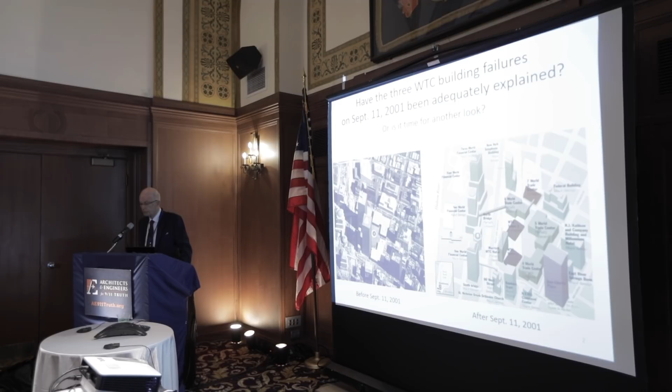The issue of the failure of these 3 buildings was a political event from the outset, because it was a shocking crime of mass murder that caused us to question our national security. Accusations and counter-accusations surrounding the circumstances of the event arose immediately and continue to this day.

The engineering profession was thrust into the middle of this controversy because we're the experts in the design and construction of commercial structures and bear the responsibility for the safety of the people using them.

Project Due Diligence, which Architects and Engineers for 9/11 Truth is publicly launching today, is our effort to strip away the political aspects of this world-changing event and look at the scientific facts gleaned from the evidence.

Our aim is to determine one thing and one thing only: did the buildings fail for the reasons given to us by the official reports? We will focus only on that question.

The information you will hear today has been collected by literally thousands of persons, both inside and outside the field of engineering, who have donated their time, money, and expertise in order to determine the truth of what happened at the World Trade Center on September 11, 2001.

So many people have contributed to this effort that it would be impossible to name all of them. But please realize that the distillation of evidence you will see today is the result of hundreds of thousands of hours of work performed mostly by volunteers and guided by the AE 9/11 Truth staff.

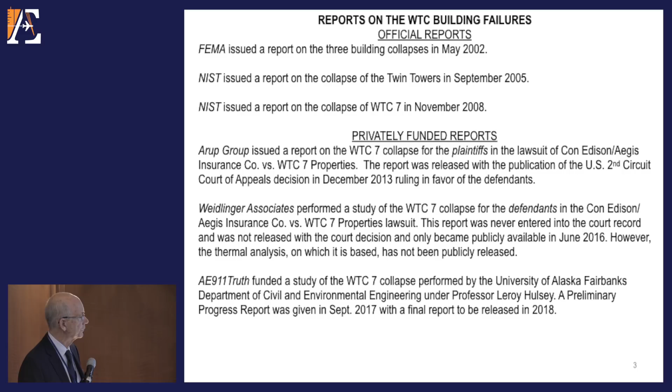Then there have been 3 privately funded reports that just looked into Building 7. The first 2, the Arup Group and the Weidlinger Associates, were done for the plaintiffs and the defendants in a lawsuit that was brought by Con Edison and their insurance company against WTC 7 Properties. Those were privately funded reports.

In addition to that, there's the study that we funded, which again looks at World Trade Center 7. There was a preliminary report last year in September done by the University of Alaska Fairbanks Department of Civil and Environmental Engineering under Professor Leroy Hulsey. So those are the sum totals of the reports on the building failures that have been done to date.

We're going to look at Building 7 first. It was the third high-rise to collapse that day. It collapsed in the afternoon, about 5:20. It was some distance away from the North Tower.

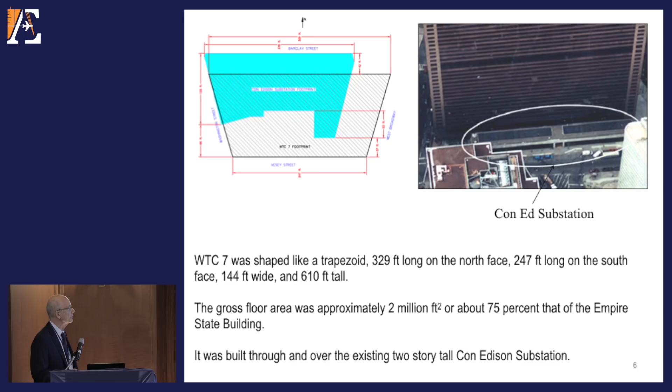47-story building. Each floor had an area of about an acre, shaped like a trapezoid, with gross floor area about 2 million square feet. It was built through and over the existing 2-story tall Con Edison substation, which you can see here. This is the floor plan of everything above the Con Edison station.

The upper right-hand corner of that floor plan is the northeast corner of the building, and that is the area we're going to focus on, because it is that area where NIST says the collapse began. You can see that there are 58 columns on the perimeter, and 24 central columns in the middle.

We're going to stand right here and look west so that we can see the structural members that are of concern here. This is that view. This girder right here is the girder that NIST says walked off of its column support at column 79, which is in the interior of the building.

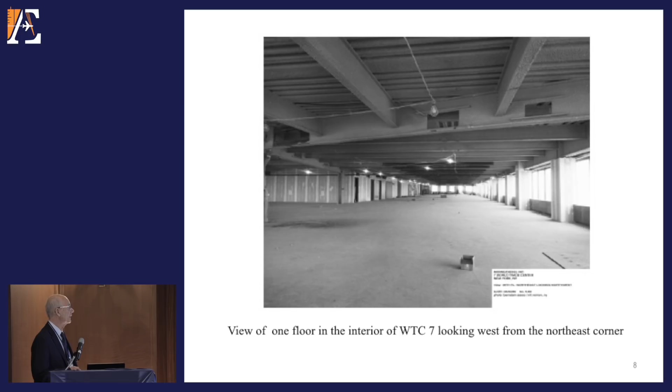It was pushed by these beams, which frame into it. Those beams were heated by the fire. They expanded and sagged, and they caused that girder to walk off its seat, and that led to a cascade of floors down below, which initiated the collapse. So we're going to pay a lot of attention to the facts surrounding those beams, that girder, and the column.

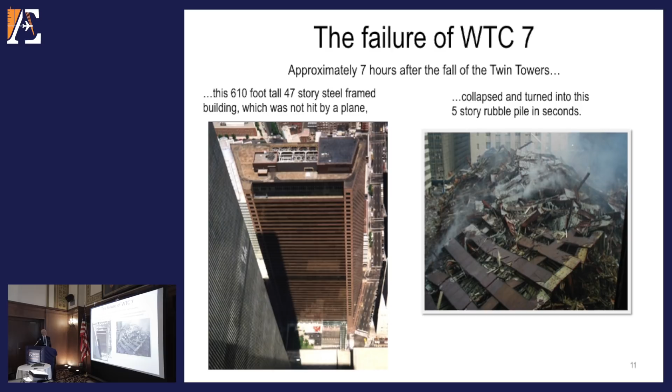When it failed, about 7 hours after the Twin Towers went down, this 47-story steel frame building, which was not hit by a plane, collapsed and turned into this 5-story rubble pile in about 7 seconds. We'll see what it looks like here.

For the third time today, it's reminiscent of those pictures we've all seen too much on television before, when a building was deliberately destroyed by well-placed dynamite to knock it down.

Did they actually use the word brought down, and who was it that was telling you this? The fire department, and they did use the word, we're going to have to bring it down.

We heard this sound that sounded like a clap of thunder. It looked like there was a shock wave ripping through the building, and the windows all busted out. About a second later, the bottom floor caved out. The building followed after that, and we saw the building crash down all the way to the ground.

And I turned in time to see what looked like a skyscraper implosion. It looked like it had been done by a demolition crew. The whole thing just collapsing down on itself.

It was almost as if it were a planned implosion. It just pancaked.

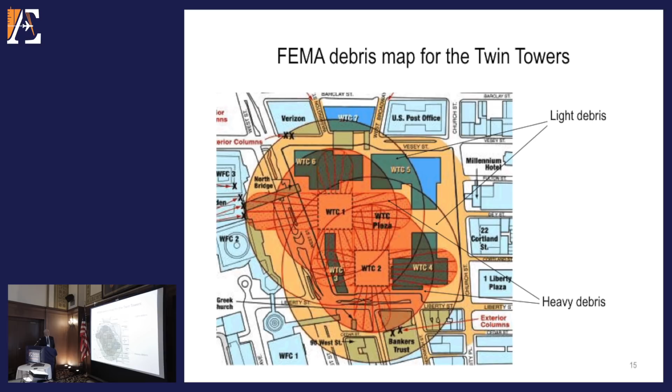That building was 350 feet away from the North Tower, and a small amount of debris from the tower hit World Trade Center 7 when it collapsed. FEMA mapped the debris, and you can see that the light debris from World Trade Center 1 reached the southern face of the building.

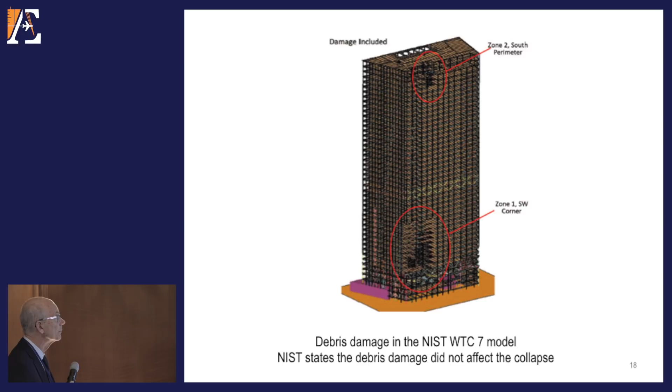NIST mapped the damage, and they indicated that the debris hit the lower part of the building in the southwest corner and hit in the upper part of the building near the top. There was diesel fuel in the building.

FEMA says that the diesel fires had a low probability of occurrence, and NIST agreed. Most of the fuel was recovered from the main tanks in a vault below ground level, and firefighters testified they neither saw nor heard nor smelled diesel fuel fires.

In the early stages, people thought maybe it was the diesel that had caused the collapse and the fires from that were affected, but NIST said no. There were fires on the 7th, 8th, 9th, 11th, 12th, 13th, 19th, 22nd, 29th, and the 30th floors. The fires on the upper 4 floors were out by 1:30.

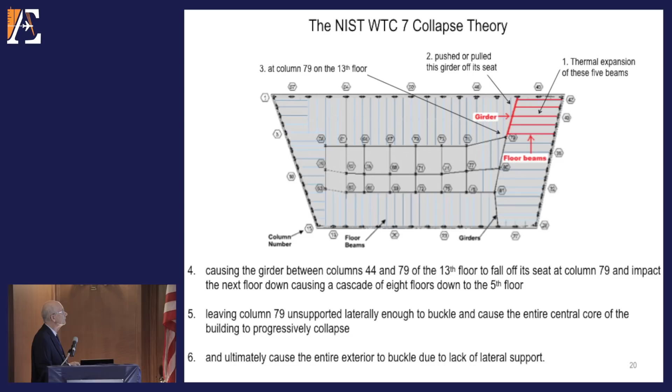Now we'll look at their collapse theory. NIST says that thermal expansion of these beams pushed or pulled this girder off of its seat at this column, column 79. And that occurred on the 13th floor.

That caused that girder to fall off its seat and impact the next floor down, which caused a cascade of floors all the way down to the 5th floor.

That, in turn, left column 79 unsupported laterally for 9 floors, and it buckled as a result, and that buckling spread from north to south and from east to west through the central core columns, and they in turn collapsed, pulling down the columns on the outside, initiating global collapse. So that's their theory.

We're going to look at the mechanism of that theory. According to NIST, the reason for the collapse was totally due to office fires. Now, office fires burn out an area in about 20 to 30 minutes because they run out of combustibles.

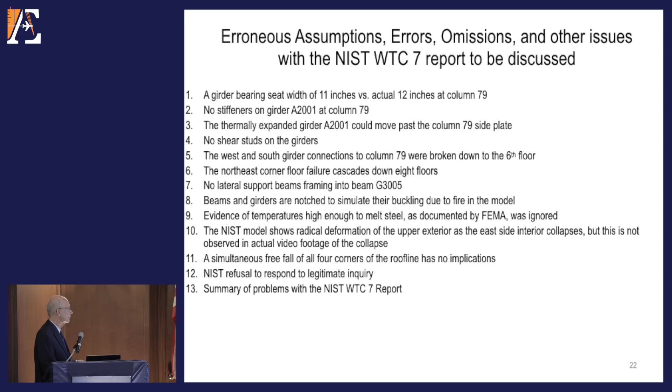That there were evidence of temperatures high enough to melt steel, documented by FEMA, that NIST ignored, and that their model shows radical deformation of the upper exterior as the east side interior collapses, but that's not observed in the actual video footage of the collapse. And they claim that a simultaneous free fall of all 4 corners of the roofline has no implications.

Then they refuse to respond to legitimate inquiry. And lastly, we'll summarize the problems with their report. So we're going to look at those issues one at a time.

So in other words, the girder, which sat here, once it was pushed past, the web was pushed past the edge of the seat, it had lost support and it would fall. So they said that needed to happen after 5.5 inches, half of 11 inches.

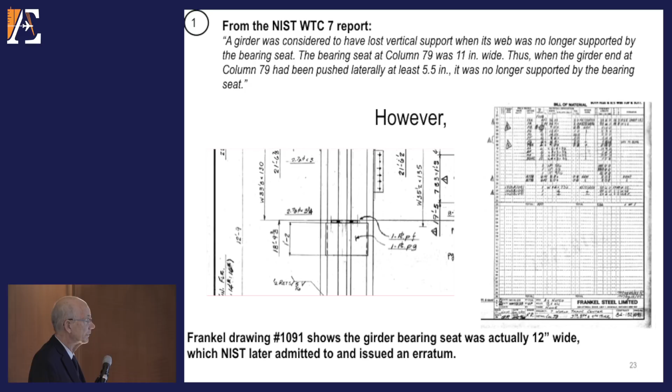But the construction drawings, the Frankel drawing, showed, drawing 1091, showed that the girder bearing seat was actually 12 inches wide. NIST later admitted that, and they issued an erratum, which was, I think, the only thing that they admitted to.

We're going to take a minute and look at the temperatures that the structural members were exposed to. The NIST report claimed that the beams were heated to 600 degrees centigrade, the girder to 500 degrees centigrade, and the columns to 300 degrees centigrade in the area around column 79.

So looking at the effect of those temperatures on the various members, this is the graph of the temperature versus the strength, and this is a graph of the temperature versus the stiffness. Both those things would be affected by temperature. So we'll take a look at those one at a time.

For the beams at 600 degrees centigrade, they would lose about half of their strength at that temperature, and they would lose about 70% of their stiffness. For the girders heated to 500 degrees, they would lose approximately 20% of their strength and approximately 40% of their stiffness. And the columns at 300 degrees wouldn't lose any of their strength and would lose about 20% of their stiffness.

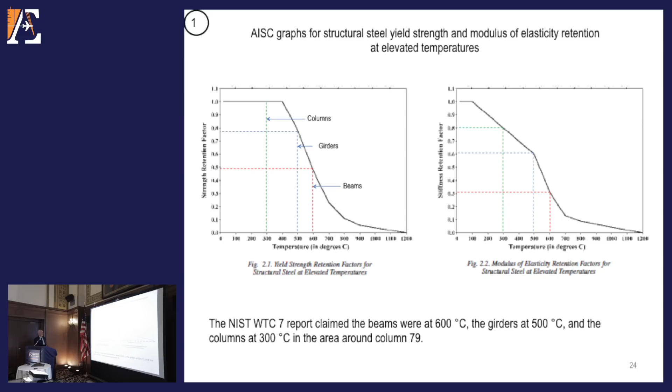Looking at the beams at 600 degrees, we see at that temperature it expands a little over 5.5 inches, but it also sags about 1/8 of an inch, for a net horizontal expansion of about 5.39 inches. That's what the statistics would indicate, where coefficient of expansion is due to heat, and it's sagging and loss of strength. The maximum that beam could ever expand is right here at 654 degrees, because at that point the horizontal expansion is about 6.17 inches, it's sagging about 0.44 inches, for a net expansion of 5.7. It could never expand any more than that, because after that the sagging takes over and it gets shorter again. So those beams could never push that girder more than 5.7 inches.

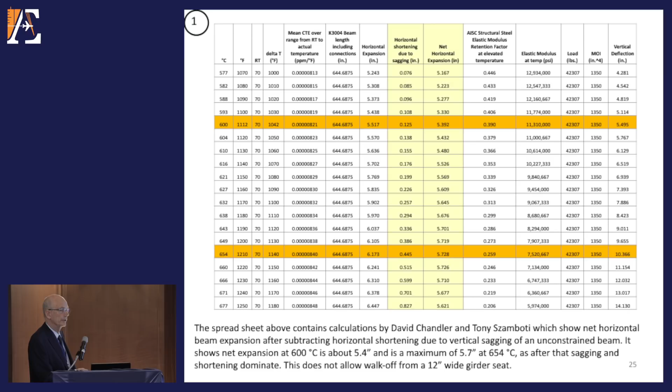So when the seat is 12 inches wide instead of 11 inches wide, the web of the girder can't get past the edge of the seat, and the girder can't fall off of the seat. So that's one of the problems that the NIST report has.

Looking at that girder connection to the column, this is the NIST depiction here. You see the girder, it's sitting on its seat, supported by its plate. The problem with this depiction is that in reality there were a couple of stiffener plates that were welded to the girder, both at the web and at the lower flange, and those stiffeners would significantly strengthen this flange here, so that if the girder were able to move past the edge of the seat, this stiffener plate would make this flange so stiff that it wouldn't curl up and the girder wouldn't fail and fall off. NIST left those stiffener plates off of their analysis.

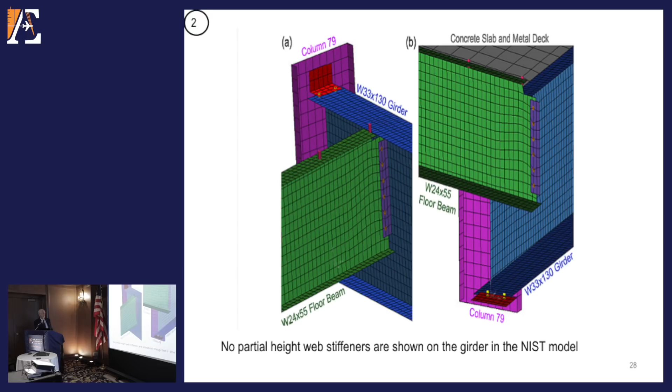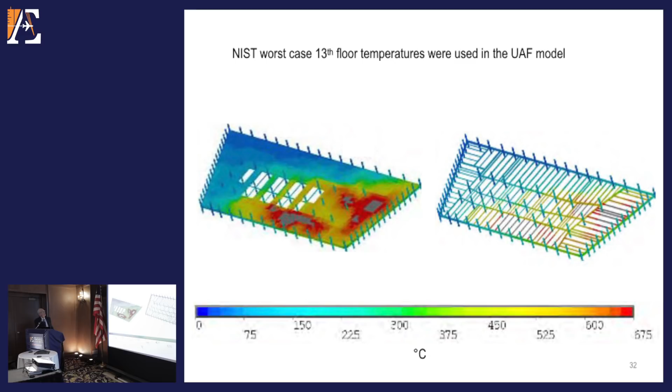We're now going to turn for a moment to the study that was done at the University of Alaska Fairbanks, and look at their finite element modeling of that particular portion of the building. This is their finite element model. It's in Abaqus, and this is the 12th and 13th floor. Again, we're looking at this area here, the northeast corner. For the University of Alaska study, they took the worst case temperatures, and this is their finite element model of that portion of the floor. It's the northeast corner, column 79 here.

And their analysis showed that with the stiffener plates attached to the girder, right here, even when the web of the girder has moved past the corner of the seat, this stiffener plate stiffens this flange to the point where it's not going to curl up and give up and allow the girder to fall. NIST finally admitted leaving the stiffeners out.

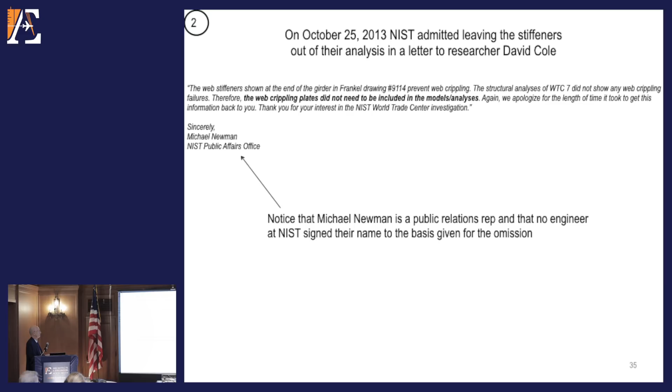In this letter, they said that the web stiffeners were added at the end of the girder to prevent web crippling, and the structural analysis of World Trade Center did not show any web crippling. Therefore, the web crippling plates did not need to be included in their model analysis. So that is a rather startling statement, and we see that it was made by somebody in their public affairs office, and I'm sure he didn't realize the significance of what he was saying, because no engineer would make that statement.

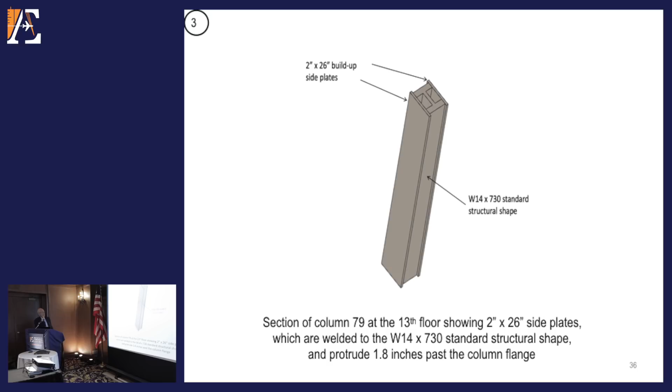Then there's the issue of side plates on the column. The side plates were welded to the column, and they protruded 1.8 inches past the column flange. This occurred at every floor.

So the UAF study shows that when you heat the beam, it pushes on the girder, the girder expands, and it gets trapped behind those side plates, so there's no way it can be pushed off of the seat. So NIST just left those side plates off, or didn't include them in their analysis. They didn't consider that question at all, the fact that that girder could never get out past those side plates.

Then there's the question of shear studs on the girders. NIST said that girder, 45 feet long, had no shear studs on it. But the final version of the revised drawings showed that there were 30 shear studs on that girder.

Why is that important? Well, NIST does an analysis of shear studs, and they show that the force required to shear this stud off is about 19.5 kips. So if you take that 19.5 kips times each of the 30 shear studs, that would be a total of 585 kips that would have to be applied by the 5 beams from the east, pushing on the girder in order to break those shear studs. That's 117 kips for each of the 5 beams.

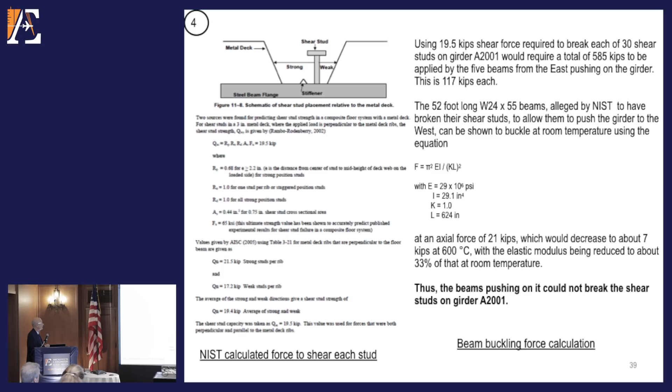But if you put an axial force of 21 kips on those beams, they begin to buckle, and they can't push any harder than that. When you increase that temperature to 600 degrees, which is what the beams are supposed to be at, that force is reduced to about 7 kips. So there's no way that a 7 kip force exerted by those beams is going to create the 585 kips necessary to break those shear studs.

NIST then claimed that the cascading floors, the girder at floor 13 fell down, hit the 12th floor, creating a cascade all the way down to the 5th floor. That left this column unsupported with no lateral support, and that's why it buckled. But there's a problem with that, because their own damage connection information shows that this is not true. They show that there was no damage to the girders from the south and the west at floors 8, 9, and 13.

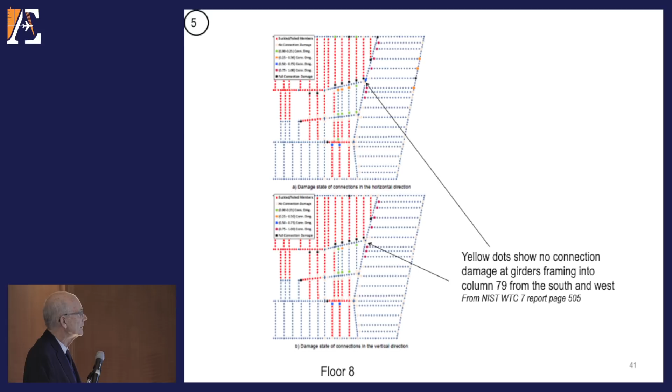We can show that here. This is off of their report. The yellow dots at the girder coming in from the south and coming in from the west, for the vertical and for the horizontal direction, shows that those connections were intact on the 8th floor. They were also intact on the 9th floor. They were also intact on the 13th floor.

So if that's true, column 79 wasn't unsupported all the way down. And this scenario that they point out is impossible, because the moment of inertia of that column shows that it could span at least 5 stories with no lateral support without buckling. So according to their own diagram, it was never unsupported for more than 3 continuous stories. Their own scenario, their own data, shows that their own analysis is not possible. That's called an internal contradiction in their report.

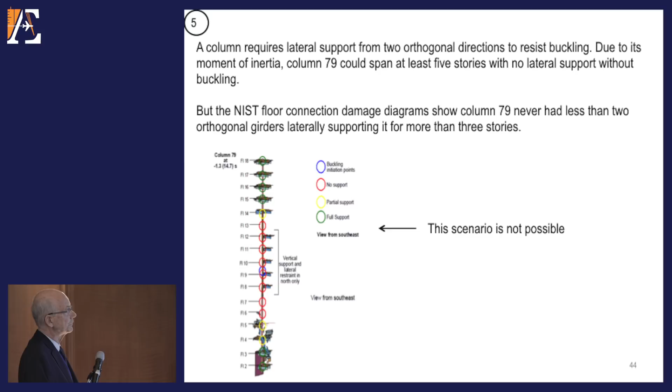Furthermore, even if we allow the girder to fall, forgetting everything that happened earlier, just allow the girder to fall, and that section of the floor is going to fall down. It's going to hit the floor near the column on the 12th floor. Now, the force required to shear the welds at that column, at the 14-inch deep support plate under the girder, is about 632,000 pounds. So that's the force we have to have hitting the floor before we can begin the cascade process.

So we did a modal analysis of that section of the floor. Here it is, the 5 beams and the girder, and you can figure the frequency of this system, which turns out to be about 0.52 hertz. You can use that to find the stiffness of this section, which turns out to be about 6,600 pounds per inch.

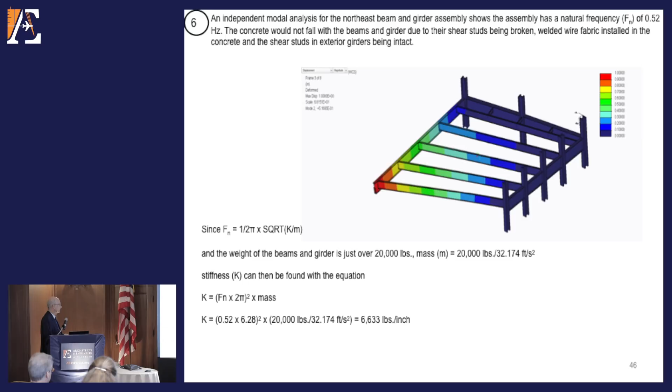Taking that stiffness and combining it with the stiffness of the floor below, which is very high, about 7.5 million pounds per inch, combining them you still get about the same number, because you use a reciprocal formula to figure that out. So the large stiffness of the floor below doesn't affect this number very much at all. Then you have a stiffness for the total system, the floor above and below, and you can figure the deflection using this formula, which turns out to be about 32 inches. So when the upper girder hits the lower floor, it deflects about 32 inches. Using that, you can find the force, which turns out to be about 215,000 pounds.

Well, that's only about a third of the 632,000 pounds that you need. And furthermore, when you heat it to 500 degrees, which is what they said the girder was heated to, the stiffness gets less, and the force it imparts to the lower floor also gets less. So you're only getting about 166,000 pounds, and you need 4 times that much in order to break that shear. So that shows that the cascade effect could never occur.

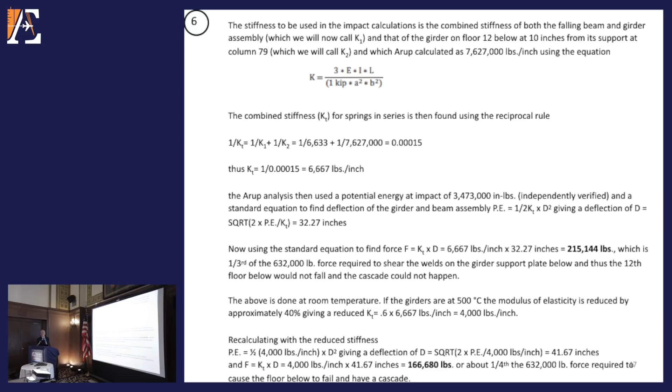Then we're going to look at the northernmost beam here. This is what they term beam G3005, and in reality that beam had 3 lateral supports coming into it from the north face of the building. The NIST analysis removed those, didn't show them at all. Now, that turns out to be important, because if you heat that beam to 600 degrees and there's no lateral support beams there, that beam's going to buckle.

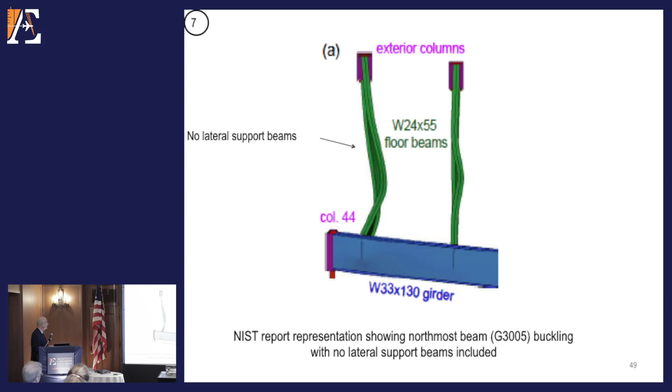That was confirmed by the UAF study. It said yes, without those beams there, that beam will buckle. However, when you put the beams in to check it, you see that it doesn't buckle.

Then there's the issue of what they did to the floor beams and girders. Here we see a picture from their report showing the floor beams and girders at the southwest corner of the building. They have notched the beams and girders in a very systematic fashion - you see they always notch half on one end on the upper side and on the lower side on the other side. They do that consistently throughout.

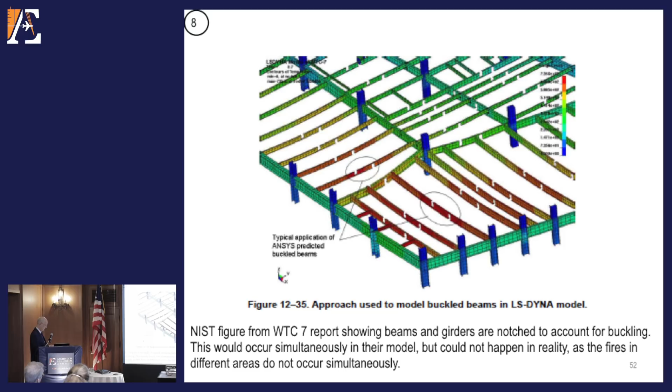Well, they do that because they have to get their global collapse theory to work. In other words, once they've got the interior columns to go down, they need to pull down the exterior columns, so they notch the beams to make it happen. But there's no justification, because the only thing working on those beams is fires, and fires are not going to create that kind of symmetrical damage to the beams and girders. So that is a totally unjustified assumption - they just do it to make their system work.

Then there's the issue of high temperatures. This is the only piece of metal that was salvaged from World Trade Center 7. NIST ignored this piece of evidence.

When that metal was examined by FEMA, they said they had microstructural changes, severe erosion, severe high temperature corrosion attack on the steel, including oxidation and sulfidation, with intergranular melting readily visible - a liquid eutectic mixture containing primarily iron, oxygen, and sulfur formed during this hot corrosion attack on the steel. And the eutectic temperature for this mixture strongly suggests that the temperature in this region of the steel beam approached 1,000 degrees centigrade, which is substantially lower than would be expected for melting the steel.

So how can you get steel to melt at 1,000 degrees? Well, you add things like sulfur. If you took thermite and added sulfur to it, you get thermate. That lowers the melting point of steel - that would be what you would do with an incendiary. Again, NIST completely ignored this piece of evidence.

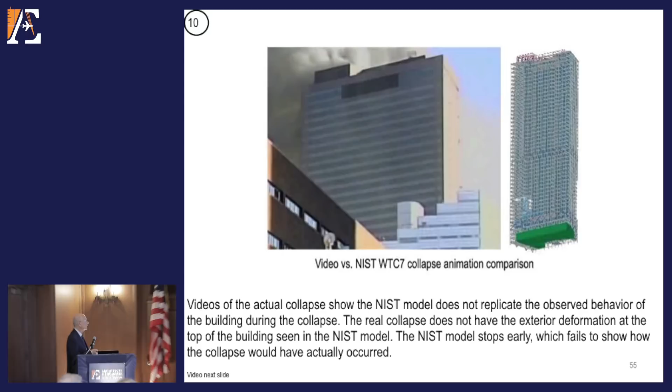We're going to look at the comparison of the actual collapse on your left with the NIST model on your right, and compare how they appear - whether similar or different. You can see down here in this area, that's the northeast corner of the building. The 13th floor collapses first, column 79 becomes unsupported, and so on. But you see what begins to happen to their model - in fact, they stopped their model after a few seconds into the recording. Compare what you're seeing on your right with what you're seeing on the left.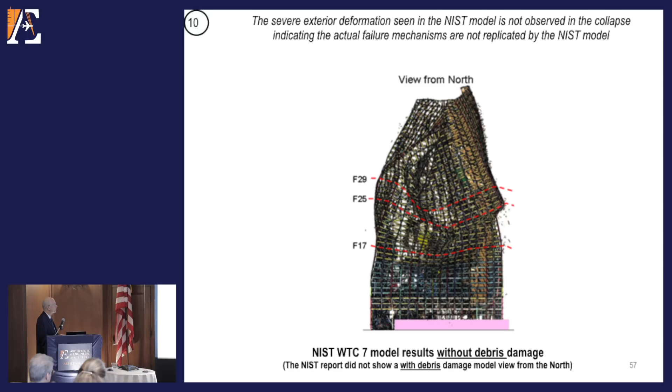This is a diagram of what that collapse of their model would look like a few more seconds into the sequence. You see why they stopped the sequence - the top of the building has twisted completely around, and the building doesn't look anything like what it looked like when it actually collapsed. This particular model is their model without debris damage to the building. They didn't even show the one with debris damage, so it must have been just as bad or worse.

Next, we look at the question of free fall acceleration. A physics teacher, David Chandler, analyzing the video, proved that the entire roof line of the building was in full free fall acceleration for about 2.5 seconds, which would be about an 8-story fall. That occurred near the beginning of its collapse. NIST was confronted with this fact during their draft report, and they admitted it in their final report, but they didn't address the implications of free fall, and they didn't change their model or their conclusion.

Here we've got a graph of the velocity of the top of the building versus time, and we see at about three-quarters of a second into the collapse, it went into free fall. The slope of this line is free fall acceleration, and that occurred from about three-quarters of a second to well over 3 seconds.

That's important because columns provide resistance during buckling. Once you initiate buckling in a column, the force required to continue buckling decays until the ratio of deflection to length reaches about 0.5. You still got a ratio that is something about a third.

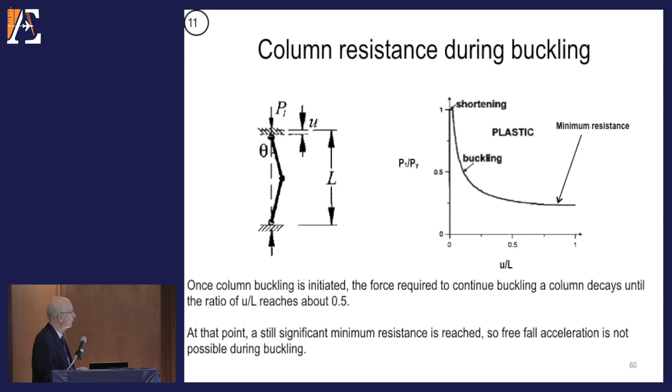Now in free fall, all of an object's potential energy is converted to kinetic energy. It can't be doing any other work. So the free falling upper section, C, could not have been crushing the lower portions B and A, or itself. It appears that section B is not providing any resistance at all. Since the NIST model never accelerates at more than 60% of free fall, it cannot explain this free fall episode in the collapse.

So all the assumptions below, which were used in their model and in their report, have been shown to be erroneous, and the correction of these assumptions invalidates their conclusion. The girder bearing seat was 12 inches, not 11 inches.

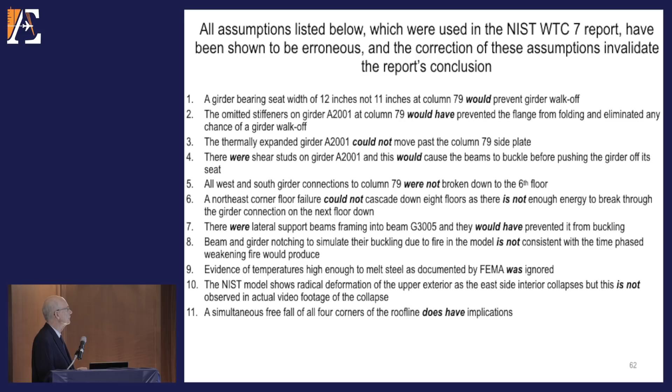The omitted stiffeners would have prevented the flange from folding and eliminated any chance of a girder walk-off. The thermally expanded girder could not move past the side plate on the column. There were shear studs on the girder, and this would cause the beams to buckle before pushing the girder off of its seat. All west and south girder connections were not broken down to the 6th floor.

Northeast corner floor failure could not cascade down 8 floors. There's not enough energy to break through the girder connection on the next floor down. There were lateral support beams framing into beam G3005, and they would have prevented it from buckling.

The beam and girder notching that NIST used to simulate their buckling due to fire in the model is not consistent with time-phased weakening that fire would produce. That evidence of temperatures high enough to melt steel, documented by FEMA, was ignored.

Their model shows radical deformation of the upper exterior as the east side interior collapses, but this is not observed in the actual video footage of the collapse. And a simultaneous free fall of all 4 corners of the roof line does have implications.

NIST refused to respond to legitimate inquiry. When asked by engineers to provide calculations and analysis results substantiating the girder walk-off at column 79 and the impact force required to break through the next floor down, the NIST director refused, claiming that it might jeopardize public safety.

So here's the letter that Ron Brookman, who happens to be here, wrote, and their response. And another letter that was written later by another engineer, same response: might jeopardize public safety. So they've taken the position that a discussion of the laws of physics might jeopardize public safety, which has got to be a first in history.

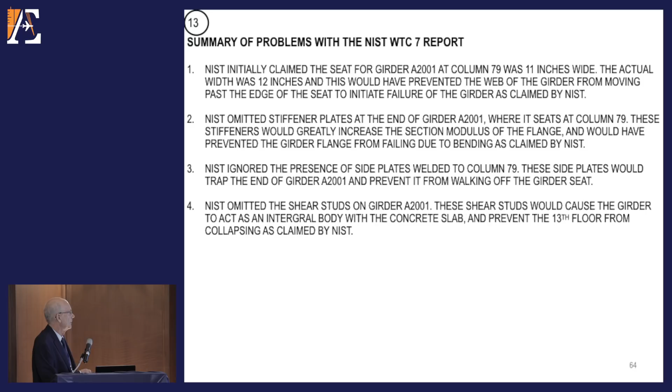They claimed column 79 was laterally unsupported for 9 stories, but their own data showed it wasn't. They omitted the lateral support beams into beam G3005 that would have prevented it from buckling.

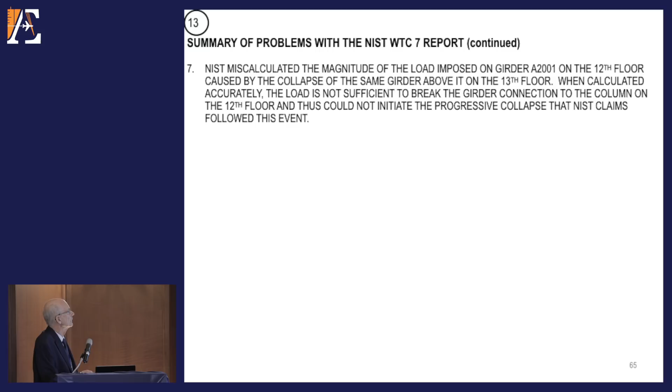They miscalculated the magnitude of the load imposed on the girder on the 12th floor caused by the collapse of the same girder above it on the 13th floor. When you calculate that accurately, the load isn't sufficient to break the girder connection to the column and could not initiate the progressive collapse that they claim followed it.

They imposed unrealistic artificial fire damage symmetrically to the floor beams in order for their computer finite element model collapse sequence to work.

They omitted the information contained in Appendix C of the FEMA report showing that the steel had evidence of intergranular melting.

Their computer model doesn't replicate the actual collapse because it deforms significantly more than what's observed, and they stopped their simulation after about 2 seconds.

They acknowledged that the building fell in free fall for 2¼ seconds, but that violates their fire-induced theory of collapse initiation, because asymmetrical fire damage couldn't result in symmetrical simultaneous loss of all 81 columns. And they refused to release relevant input data for critical calculations of their collapse models, saying that this information could jeopardize public safety.

All right, now we're going to look at the Twin Towers.

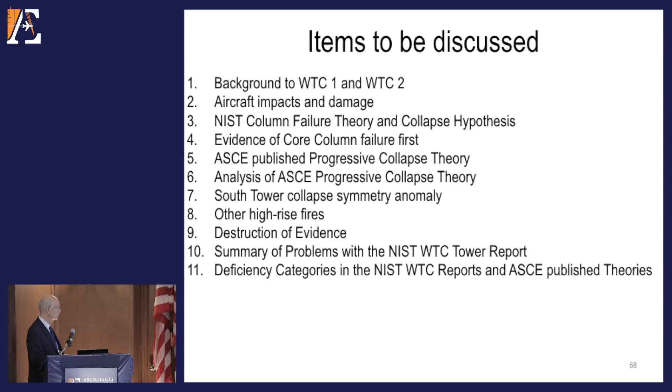We're going to look at the background into the construction and design of the buildings, look at the aircraft impacts, the NIST column failure theory and their collapse hypothesis, the evidence that the core columns failed first. We'll look at the ASCE published progressive collapse theory and analyze that theory. We'll look at the South Tower collapse and the symmetry anomaly, other high-rise fires, and the destruction of the evidence. We'll summarize the problems with their tower report, and categorize the deficiencies in their report and in the ASCE published theories.

The Twin Towers were a departure from the high-rise tradition. Most high-rises were built with a continuous grid of steel columns, beams, and girders. The Twin Towers were built as a tube structure with a dense mesh of welded and bolted steel placed on the perimeter, giving more efficient lateral load resistance. It also had an internal core of large welded steel columns connected by bolted horizontal beams at every floor, and the core and the perimeter columns split the gravity loads.

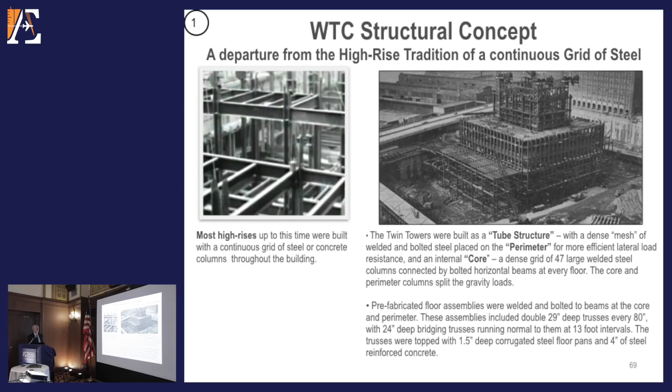So half the load is carried on the outside, half's carried with the core. Then you have prefabricated floor assemblies welded and bolted to the beams at the core and at the perimeter, made up of double 29-inch deep trusses every 80 inches with 24-inch deep bridging trusses running normal to them every 13 feet. They're topped with 1.5 inch deep corrugated steel floor pans and 4 inches of steel-reinforced concrete. This allows for a much more efficient use - you can build the building lighter and stronger.

These structural innovations allowed for an open floor plan. The perimeter of the building was a 207-foot square. The core in the middle is 135 feet by 87 feet, and the largest floor span allowed is 60 feet.

They were very solidly constructed, had 47 massive steel core columns, 240 steel perimeter columns. That amounts to a steel frame that was a 100,000-ton heat sink.

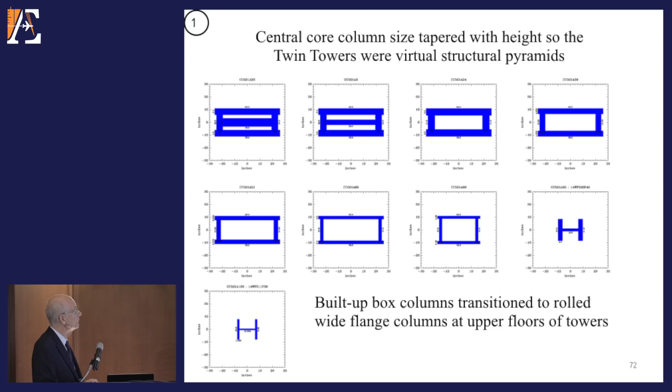The central core columns were tapered as they rose up into the building, so they were virtual structural pyramids at the lower floors - heavy as they rose up into the towers. They eventually transitioned to rolled wide flange sections so that the very solid bottom got lighter as it went up at the top, because of course it had less weight to carry.

There were 12 different strength steels used at different heights on the perimeter columns. That's to accommodate the wind load and the seismic stresses, keeping the gravity-induced unit stress on both the perimeter and the core columns at each floor the same. That's to eliminate floor warpage.

The planes hit the buildings on 9/11. The North Tower was hit first at 8:46. It collapsed 102 minutes later. That was American Airlines Flight 11, a Boeing 767-200 extended range, with an estimated velocity of 473 miles per hour. It hit in the dead center of the north wall between the 93rd and the 99th floor.

The South Tower was hit at 9:03, 17 minutes later. It collapsed in 56 minutes. That was United Airlines Flight 175, the same aircraft, a 767-200ER. Estimated impact velocity was 566 miles an hour, and it hit on the south face of the South Tower between the 77th and the 85th floor.

You see it did not hit straight on like the North Tower was - it hit at an angle more towards the corner of the building. Notice also that the shape of the central core was different. Here you're hitting on the long side, on this one you're hitting on the short side.

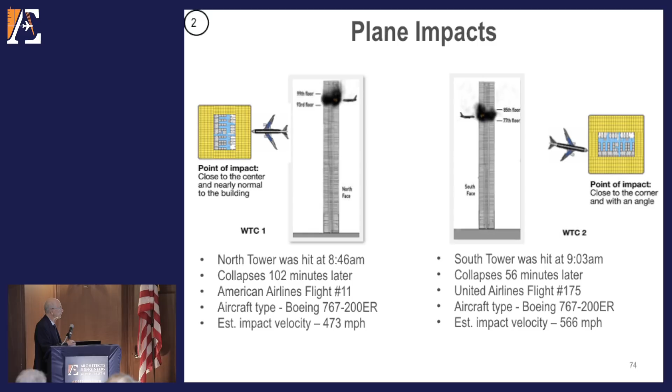Looking at the North Tower, it hit between the 95th and the 96th floors, pitched about 10 to 11 degrees down, and the 98th floor is where the collapse actually initiated. There's no argument about that because that's photographic evidence. Up here is where the collapse started - the plane hit down here.

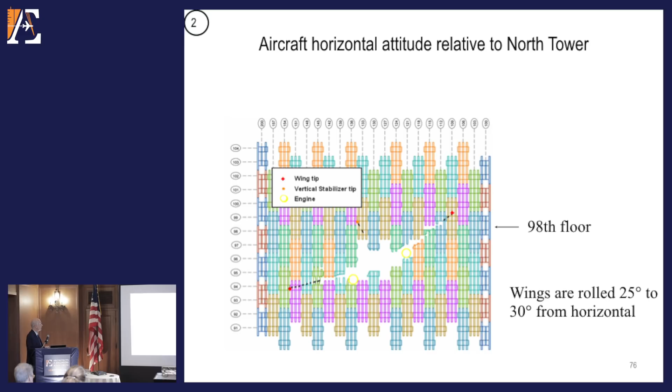If you look at the north face, you see that the wings were rolled up at about 25 to 30 degrees, so the impact zone looked like this - between the 95th and 96th floor mainly. You see the 98th floor had very little damage to it.

Here's a discussion of that impact. The fact that they were designed to resist over 13,000 tons of wind pressure meant that they could not be knocked over. In a remarkably prescient interview given over 15 years ago, Charlie Thornton, now one of the investigators, considered the scenario: 'Well, 13,000 tons is a lot of force. People always talk about an airplane crashing into a building. And in 1944 or 45, a plane did crash into the Empire State Building.'

The largest aircraft flying today, at least commercially, the 747 fully loaded, is on the order of 300 tons. If you think about a 300-ton element crashing into a building that's been designed to carry 13,000 tons, you can see that an aircraft crashing into the World Trade Center would probably not do anything to the major building. It could affect localized structural elements, could knock out a column, and there could be some damage.

But as far as a plane knocking a building over of that type, that would not happen. Since the Empire State accident had shown that a plane could crash into a New York skyscraper, the designers were forced to consider the possibility. In fact, the towers were designed to take a hit from a Boeing 707. John Skilling, the designer, said that his analysis indicated the biggest problem would be the fact that the fuel would dump into the building, but the building structure would still be there.

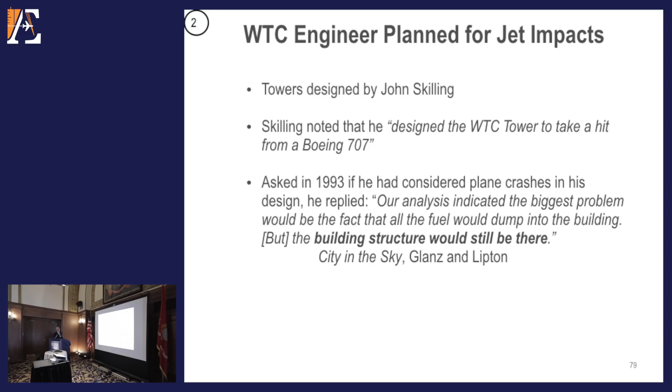The Boeing 707 is very close in size to the Boeing 767s that actually hit the building. The robustness of the perimeter frame tube system and the large size of the building helped the towers withstand the impact, and the structural system redistributed the loads without collapsing in the place of the aircraft impact. That's what NIST admits. Looks something like this.

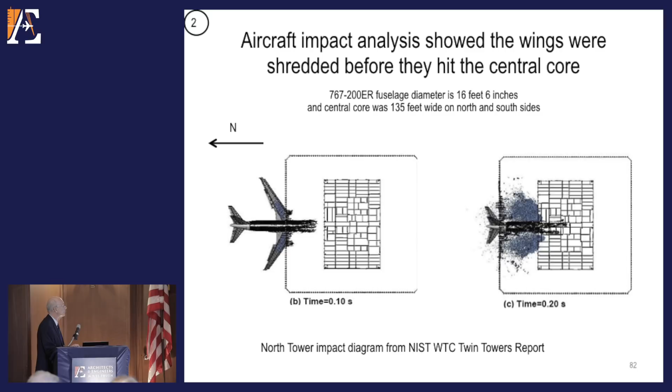They analyzed the aircraft impact, this is the North Tower again, and said that the wings were shredded before they hit the central core. The diameter of the fuselage is only about 16.5 feet. The central core was 135 feet wide. So there's very little damage to the central core caused by the plane impact.

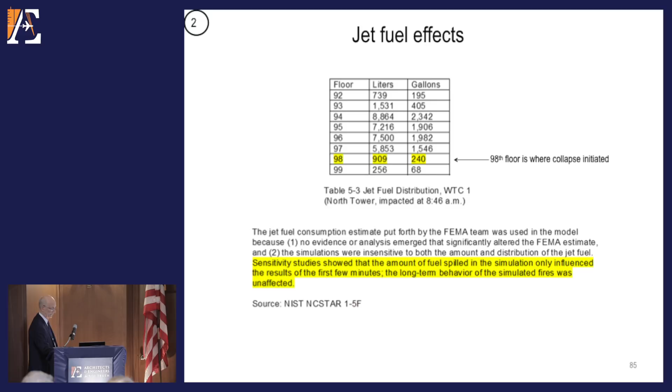As to the jet fuel effects, on the 98th floor you only got about 240 gallons of the total of 10,000 gallons that the planes carried that were distributed to that load. The amount of fuel spilled in the simulation only influenced the results in the first few minutes. The long-term behavior of the simulated fires was unaffected. So most of that fuel burned off rapidly, and the remaining fires were caused by the contents of the building.

Here's why the aircraft impact and the jet fuel could not have caused collapse. The wings didn't make it to the central core. Most of the jet fuel was aerosolized on impact, and much of it remained outside the building. That which did enter the building burned up within a few minutes. The redundant steel frame redistributed the loads, and the factor of safety against vertical collapse for the perimeter columns was 5-to-1, and for the central core was 3-to-1. This is far too high for the impact damage to approximately 20% of the columns to have caused collapse.

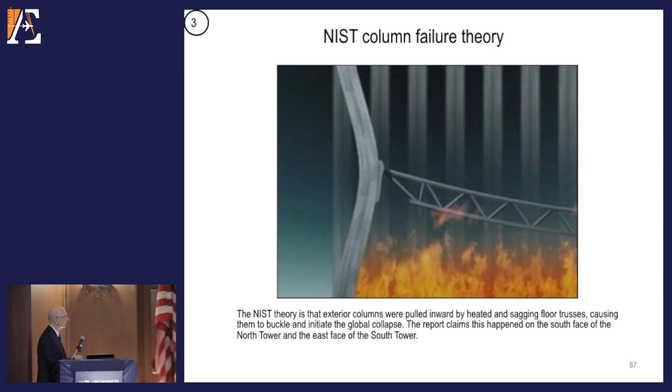Now, the NIST theory is that the perimeter columns failed in the following manner: the fires inside the building heated up the floor trusses, and the floor trusses eventually buckled and sagged and pulled the perimeter columns in, and they buckled, and that's what initiated the collapse of the building.

However, their global model couldn't produce an inward force from the sagging floor trusses that was strong enough to pull the columns inward. So they supplied an inward bowing force of 5,000 pounds to each truss-to-column connection at each story in the impact zone.

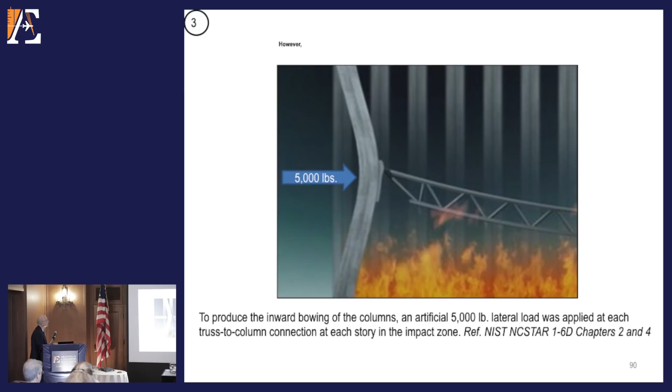They did that because they said, well, we see that the columns bowed in before the buildings collapsed. We couldn't get the force with the sagging floor trusses, so we'll apply these artificial forces in order to make it work. Very creative. That force of 5,000 pounds to each undamaged truss-to-column connection is about 750 kips that they applied to that face of the building in order to make it act in the following way.

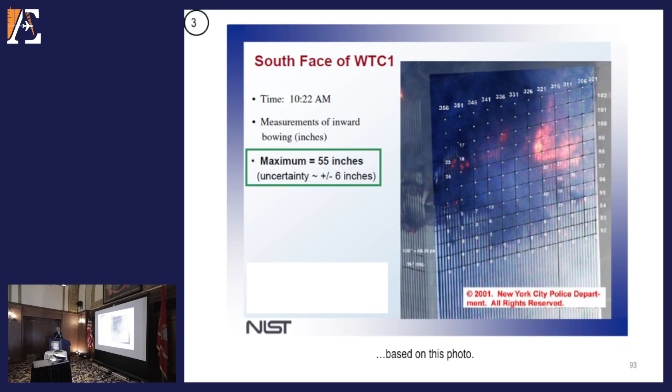This is the area that deflected inward. It deflected inward according to this measurement, which is taken off of a photograph, a total of about 55 inches. That was at 10:22, which was 7 minutes before the building collapsed.

So looking at their explanation carefully, they said that the south wall — again we're talking about the north tower that was hit on the north side — they said the south wall collapsed with continually increased bowing. As more columns buckled, the entire width of the south wall buckled. Instability started at the center of the south wall, rapidly progressed horizontally toward the sides. As a result of the buckling, the south wall significantly unloaded, redistributed its load to the softened core, through the hat truss, and through the east and west walls through the spandrels.

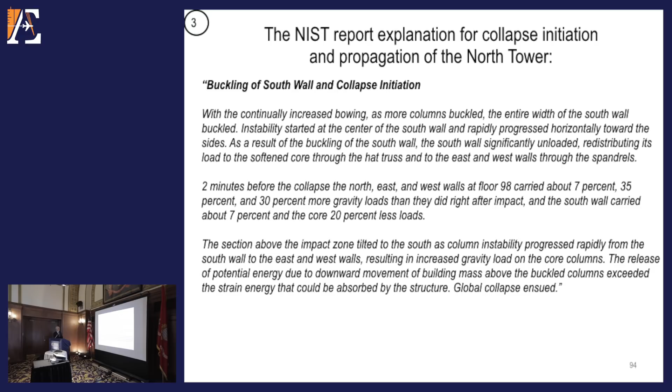Two minutes before the collapse, the north, east, and west walls at floor 98 carried about 7%, 35%, and 30% more gravity loads than they did right after the impact, and the south wall carried about 7% less, and the core 20% less loads. Then the section above the impact zone tilted to the south as the column instability progressed rapidly from the south wall to the east and west walls, resulting in an increased gravity load on the core columns. The release of potential energy due to the downward movement of the building mass above the buckled columns exceeded the strain energy that could be absorbed in the structure, and global collapse ensued.

So that's their description of the collapse initiation, okay, how it all started. Started in the south wall, spread to the east and west walls, pulled in the columns, led to global collapse.

The problems with their report are these. There's no evidence or basis for the claim that sagging trusses could pull in the south wall of the north tower. In fact, their own model showed that.

They couldn't get the loads that they needed, so they applied artificial loads that was necessary to match the photographic evidence. With a factor of safety of 5, the load increase to the east wall and the load increase to the east and west walls of 35% and 30% respectively would only increase the demand on those columns to about 27% of their capacity. So there's no reason to expect them to fail.

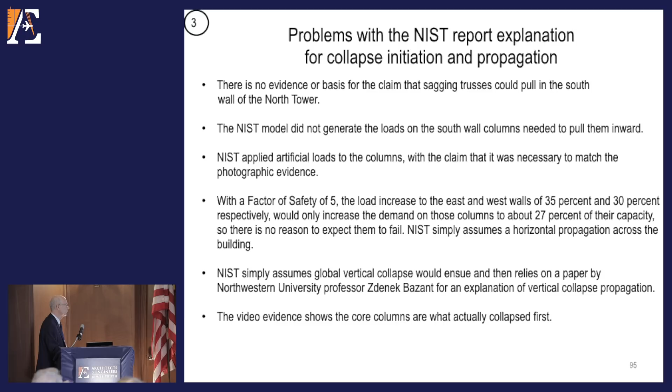They simply assume a horizontal propagation across the building, and then they simply assumed global vertical collapse would ensue. And then they relied on a paper by Northwestern University professor Zdeněk Bažant for an explanation of the vertical collapse propagation. The video evidence, however, shows that the core columns are what actually collapsed first.

We'll see that here. When the collapse finally starts, the antenna started just a little bit before the exterior of the building started. And that tells us that the core columns let go first.

FEMA said that the core columns failed first. They noted that the transmission tower on top of the north tower began to move downward and laterally slightly before movement was evidenced at the exterior wall. This suggests that the collapse began with one or more failures in the central core area of the building. That's directly from the FEMA report.

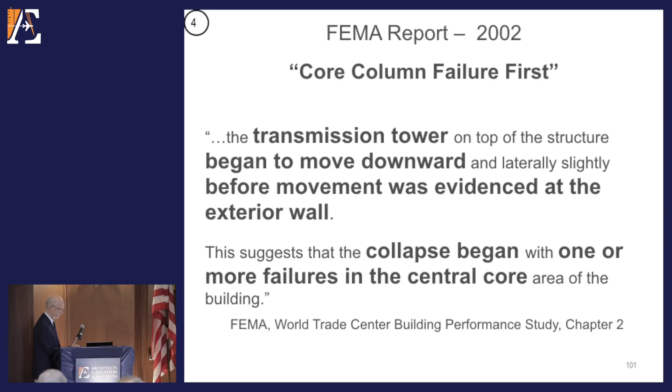So the NIST and FEMA reports are contradicting each other. The hat truss that they were talking about sits on the top of the building, and it serves to transfer the vertical and lateral loads between the perimeter columns and the core columns. The core columns supported the hat truss, and the hat truss supported the antenna. So the core columns failed first, and that's shown by the video evidence, and FEMA agreed with that.

Core columns fail, the hat truss and the antenna descend before the perimeter columns. Then the core columns pull on the floor trusses, and the floor trusses are what pulls in the perimeter columns, and that's what initiates the complete collapse of the building.

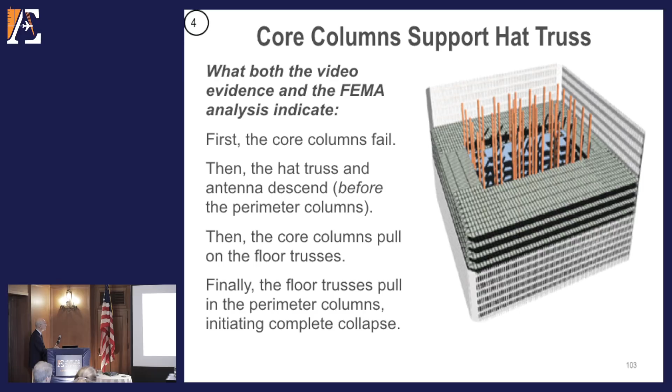It must have been caused by the core column failures, because the core columns pull on the floor trusses, and the floor trusses would pull in the perimeter columns, and that would initiate complete collapse. It would look like this.

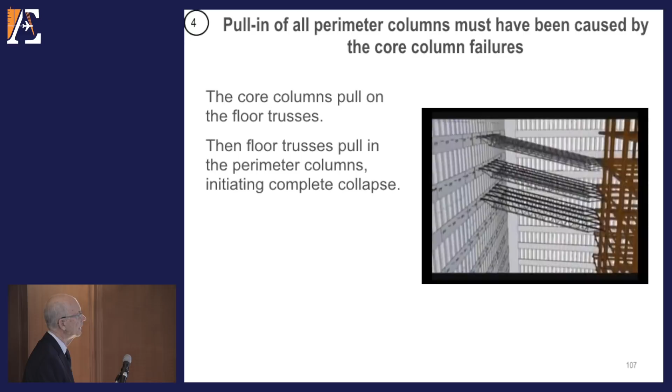So now we're going to look at the progressive collapse theory that NIST used to explain their collapse of the Twin Towers, and it was submitted to the ASCE Journal of Engineering Mechanics 2 days after the attacks. So this guy came up with this theory within 2 days and submitted it for publication, and the ASCE published it in January of 2002, about 4 months later.

He claimed that a large dynamic load would have occurred caused by what he termed a powerful jolt, and that would overcome the reserve strength of the columns below.

But various questions were raised about his theory, and he had to defend it again in an article titled "What Did and Did Not Cause the Collapse of World Trade Center Twin Towers in New York," which the Journal of Engineering Mechanics again published in October of 2008.

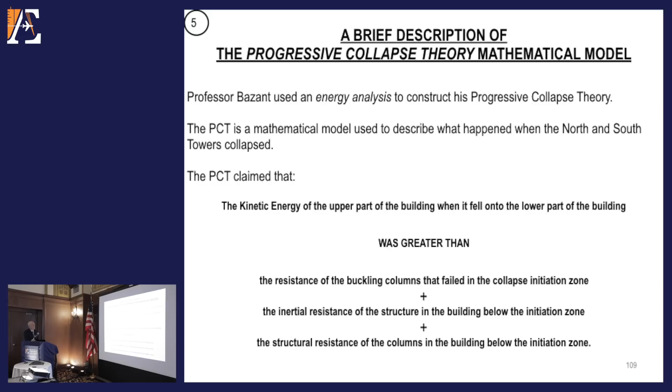He used an energy analysis to construct his progressive collapse theory, and that's a mathematical model that claims that the kinetic energy of the upper part of the building when it fell on the lower part of the building was greater than the resistance of the buckling columns that failed in the collapse initiation zone, plus the inertial resistance of the structure in the building below the initiation zone, plus the structural resistance of the columns in the building below the initiation zone. So, in mathematics, it looks like this.

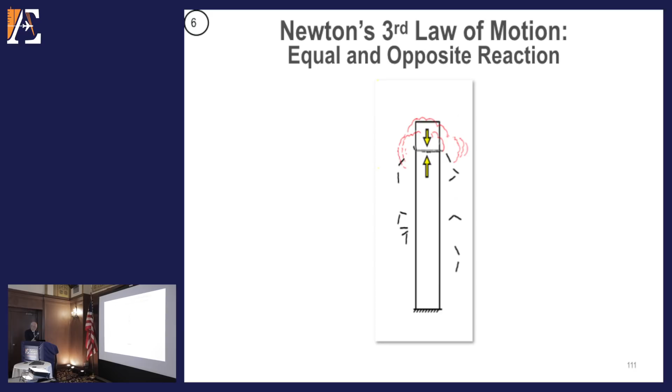Now, Newton's third law of motion says that for every action, there's an equal and opposite reaction. So when the upper part of the building fell on the lower part of the building, there must have been an equal and opposite force opposing that impact.

MacQueen and Szamboti published "The Missing Jolt, A Simple Refutation of the NIST-Bazant Collapse Hypothesis" on a website. And Chandler published his "Destruction of the World Trade Center North Tower and Fundamental Physics" on the same website a year later. So Bazant and his co-author again defended their theory, why the observed motion history of the World Trade Centers is smooth. In January of 2011, JEM published that.

Szamboti and Johns came back and submitted a discussion paper and said that there were errors in Bazant's paper. So, a year later, they were notified by the Journal of Engineering Mechanics that their discussion paper was rejected on the basis of one reviewer's comments.

So they immediately responded to that rejection with a rebuttal showing that the rejection was unjustified and the reviewer was wrong on almost all points. So then the JEM editors responded by agreeing to publish their paper. But another year went by and they didn't.

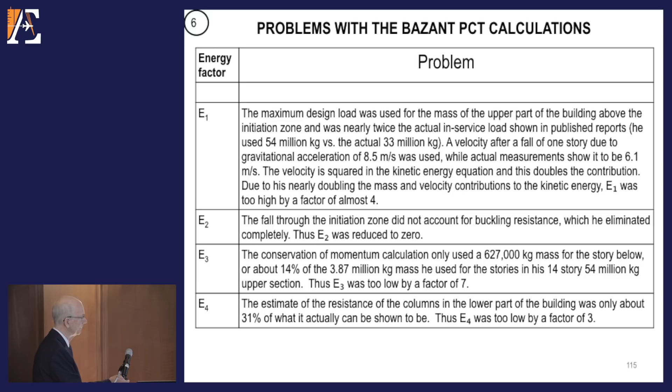So we see a pattern here: this was too high by a factor of 4, this was 0, this was too low by a factor of 7, this was too low by a factor of 3. When you correct those miscalculations in his theory, you get a reversal of the inequality. E1 is less than E2 plus E3 plus E4, and the progressive collapse will not occur. This is why ASCE doesn't want to discuss this matter.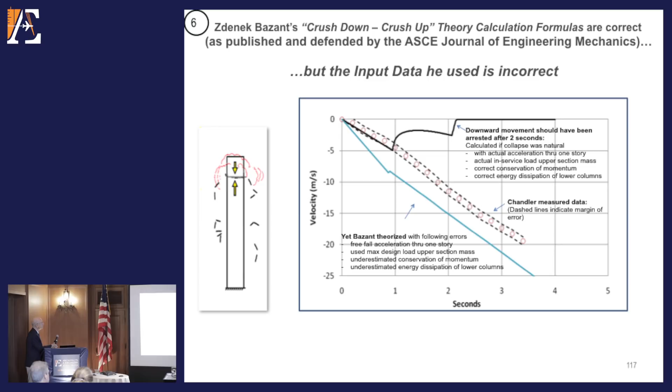When you graph his results, Bazant's is on the left here in the blue line, the actual measured by Chandler, and what it should have been if the values were corrected. You see he has no jolt and the acceleration continues. The actual acceleration did continue according to Chandler, but if you put in the correct values, the collapse would have stopped after about 2 seconds. So the building shouldn't have collapsed, according to his own theory.

In a gravitational collapse, you'd see the top 12 stories of the building driving down the lower part of the building. But here in the photo, you see that it's already disappeared, and the collapse is not even halfway done. According to FEMA, the primary debris field is about 1,200 feet in diameter, and a lot of the material landed outside the tower's footprint. We're going to watch what happens here, and we'll see that half of the 12 stories disintegrate in about 3 seconds before any collapse occurs below. Watch the top of the building versus the top of the lower section.

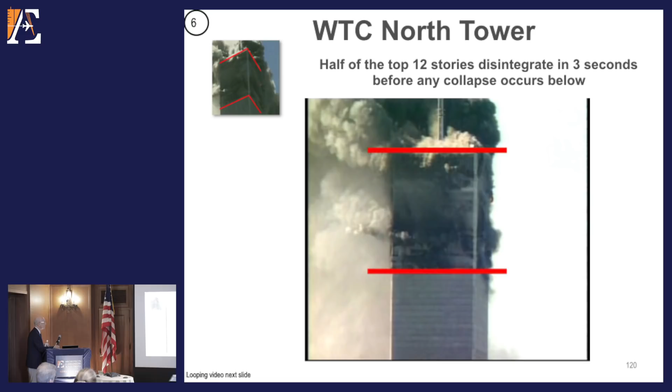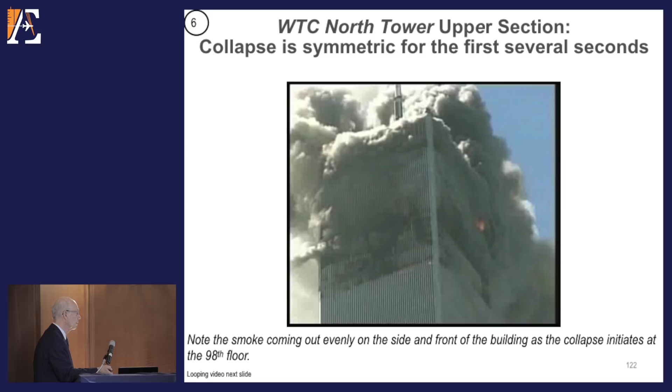Somehow the upper part of the building is disappearing without the lower part being affected. The collapse is also symmetric for the first several seconds. Notice that the smoke is coming out evenly around the building on all sides.

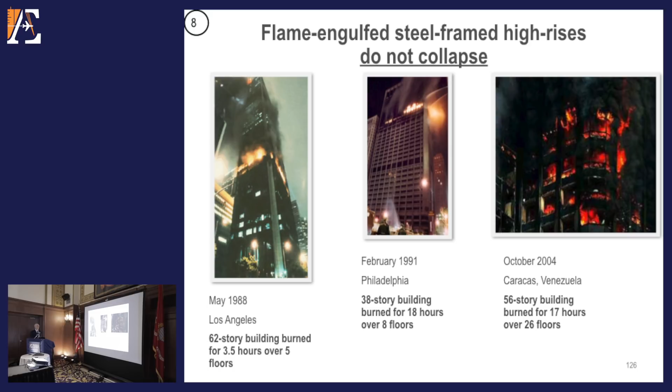Then there's a question of how fires relate to steel frame high-rises. There's never been a case where a steel frame high-rise collapsed due to fire. There are 3 examples here: a 62-story building in Los Angeles, burned for 3.5 hours over 5 floors. Philadelphia in '91, 38-story, burned 18 hours over 8 floors. And October 2004 in Caracas, Venezuela, a 56-story building that burned for 17 hours over 26 floors. None of those buildings collapsed or showed any signs of potential collapse. In fact, it had never happened that a steel-framed high-rise had collapsed due to fire before September 11th, 2001, or since.

Bill Manning was concerned about the destruction of the evidence. He's the editor-in-chief of Fire Engineering magazine. He said structural steel from the World Trade Center has been and continues to be cut up and sold for scrap. Such destruction of evidence shows an astounding ignorance of government officials to the value of a thorough scientific investigation.

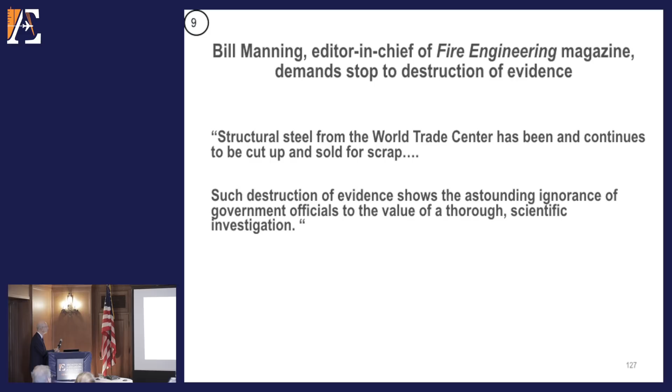Very little effort was made to preserve the evidence related to this unprecedented collapse of the skyscrapers 1, 2, and 7 - easily the 3 largest and most perplexing structural failures in history.

When did you become aware that the steel from the World Trade Center was being sold off? I think it was on the order of a week or so before we arrived on site, on October the 5th, I believe it was. So in other words, the city was selling or disposing of material within 2 weeks of the actual event?

I believe I was the first one to find out that the steel is being recycled. New York Times reporter Jim Glanz told me 2 weeks after the collapse, and I tried to contact the city, and New York Times reporters also tried to make sure we could have access to the steel to do the research. It was not happening. I just think there's so much that has been lost in these last 6 months that we can never go back and retrieve.

400 truckloads per day of material were taken away from the World Trade Center site and sent to China for recycling. There were laws violated in the destruction of that evidence. And for the American Society of Civil Engineers to ignore those events is extremely disturbing and is, in my opinion, a violation of their professional code of ethics.

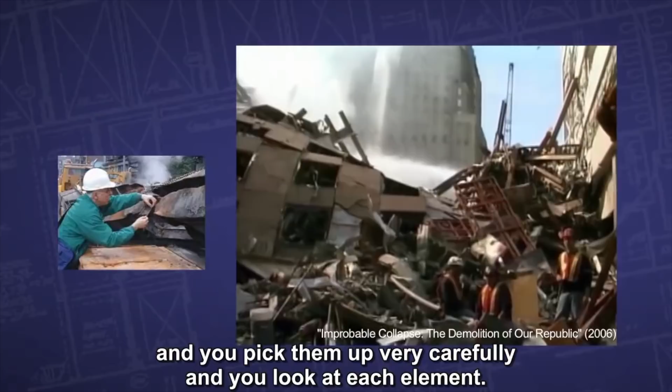It was contrary to the way all investigations are done. If an airplane crashes, they seal off the entire area, nobody touches anything, they move it to a secure location, and they reconstruct the aircraft. Normally, when you have a structural failure, you carefully go through the debris field, looking at each item, photographing every beam as it collapsed and every column where it is in the ground, and you pick them up very carefully and look at each element. We were unable to do that in the case of Tower 7.

You can't do science when you are deprived of the evidence and when your hypothesis is the least valid instead of the most likely - when the most likely hypothesis in the case of Building 7 wasn't even mentioned. This is not science. It's trying to prove preconceived ideas.

Destruction of the evidence - this is John Gross. He's one of the engineers from NIST. He was in the salvage yards deciding what material to save for further analysis. They only saved between a quarter and half a percent of the steel from the Twin Towers, and only one small piece from World Trade Center 7, which we saw earlier.

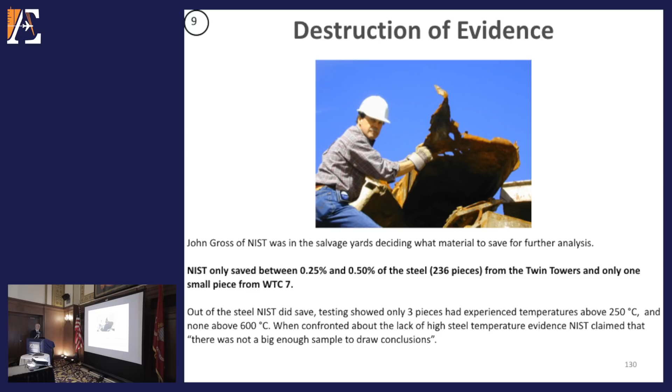Out of the steel they did save, testing showed that only 3 pieces had experienced temperatures above 250 degrees centigrade, and none above 600 degrees centigrade. When they were confronted about the lack of high steel temperature evidence, they claimed that there was not a big enough sample for them to draw conclusions. However, they were the ones that were selecting the sample.

We looked at this before. The USGS flew over the site 5 days later, and there were high temperatures noted on the surface. Again, there was no mention of them in any of the reports.

So to summarize the problems with the World Trade Center Tower report: their claim that the upper part of the towers crushed the lower part of the towers violates the law of conservation of momentum and the law that for every action between bodies there's an equal and opposite reaction, as shown by the measured, smooth, uninterrupted descent of the upper portion of the North Tower.

They claim that the floor trusses pushed outward on the perimeter columns with a force of about 80 kips before starting to sag and pull the columns inward to cause the buildings to collapse, but there's no evidence to support this claim. Extensive photos and videos of the tower show no outward bowing of the perimeter columns at any time during the fires before the collapse, which would have had to occur if they had been subjected to an 80 kip force.

They imposed unrealistic artificial 5 kip forces per story on all the perimeter columns with floor truss connections over the complete 5 stories of the damage zone on the south face of the North Tower, in order to make them collapse and make their initiation model work. This amounts to a lateral force of about 750 kips applied to that face of the building, which cannot be justified by any rationale.

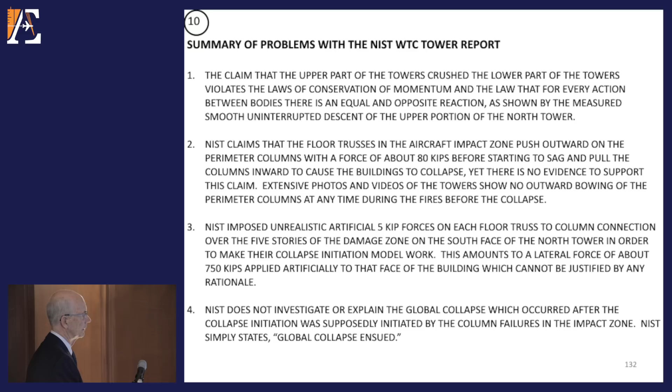Their collapse sequence was initiated by the failure of the floor trusses, according to them, in the impact zone, subsequently pulling in of the perimeter columns. But this sequence ignores the fact that the core columns failed first, evidenced by the video of the North Tower collapse showing that the antenna and hat truss resting on the core columns began their descent well before the outer perimeter of the building began to fall.

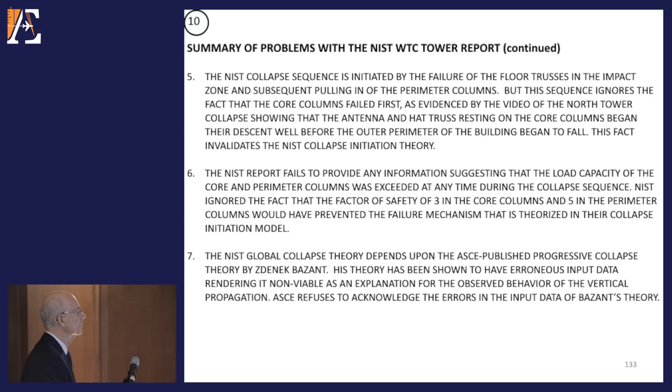They failed to provide any information suggesting that the load capacity of the core and perimeter columns was exceeded at any time during the collapse sequence. They ignored the fact that the factor of safety of 3 in the core columns and 5 in the perimeter columns would have prevented the failure mechanism that they theorize in their collapse initiation model.

Their global collapse theory depends upon the ASCE published Progressive Collapse Theory by Zdenek Bazant. His theory has been shown to have erroneous input data, rendering it non-viable as an explanation for the observed behavior of the vertical propagation. They refuse to acknowledge the errors in the input data of his theory.

If we categorize the errors into specific categories, we get the defective collapse initiation theories in both buildings, the Twin Towers and World Trade Center 7. They make unjustified assumptions and errors in both reports.

There are omissions and alterations of the construction details in the World Trade Center 7 report. There are errors in the calculations of their ASCE published theories. There are internal contradictions in the World Trade Center 7 report. They ignored the evidence of high temperature exposure of the structural steel in World Trade Center 7. And both NIST and ASCE refused to respond to peer criticism.

So in closing, I'd like to point out that the information we've collected and presented here brings us to the conclusion that the NIST reports on the destruction of the 3 buildings, along with the ASCE progressive collapse theory that purports to explain the collapse of the Twin Towers, cannot survive rational scrutiny, and therefore a new investigation is required.

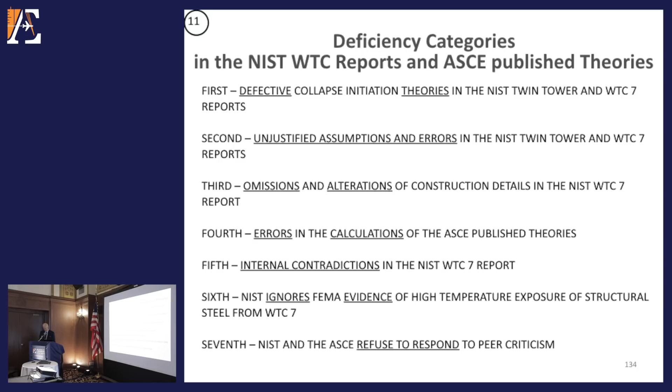It is an ironic twist of fate that today we engineers find that the destruction of these 3 buildings gives our profession the opportunity, indeed the obligation, to take a stand for a new investigation of these events, and in so doing, create the chance to move the world to a better place.

So here's what we can do. As engineers, anyone can sign the Architects and Engineers for 9/11 Truth petition for a new investigation, disseminate the information to our engineering colleagues, donate to AE 9/11 Truth to help us reach as many engineers as possible with this information, urge any engineering organization to which you belong to call for a new investigation, and become a volunteer presenter for Project Due Diligence to help deliver this information to local engineering organizations.

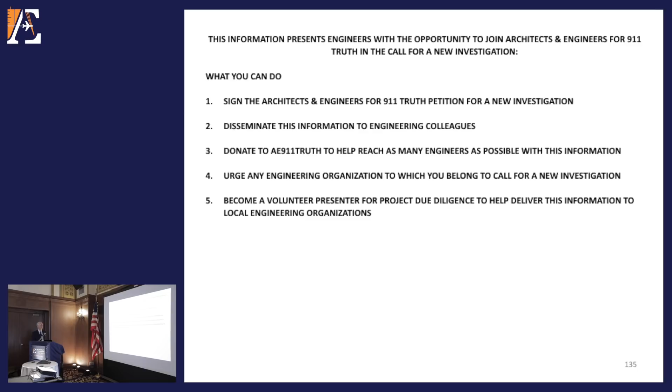What would that new investigation that we want look like? We would recommend that we be allowed to participate as an organization, since we've been leading the call for a forensic investigation all this time. That it be composed of a panel of civil, structural, fire protection, mechanical engineers, physicists, chemists, and demolition experts.

That the panel members be vetted so that they have no conflict of interests. That it be provided with a staff to prepare documents and keep records. That it have subpoena power. That it have adequate funding. A reasonable timeline to conduct the investigation and prepare a peer-reviewed report, and that report be released and broadly disseminated to the public.

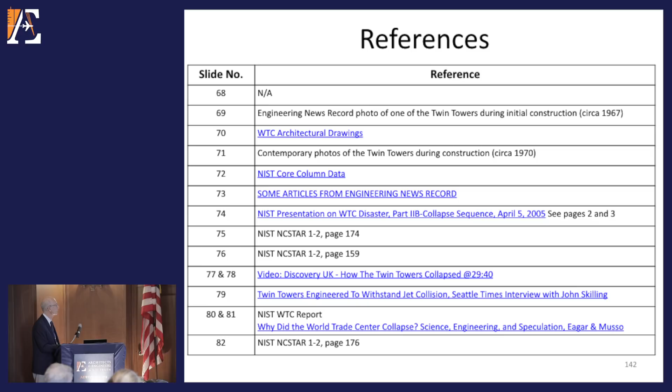At the end of this presentation, we have a reference for every slide that you've seen. These reports, some of them are videos, some of them are hyperlinks, some of them are PDF files. Every slide that you've seen is referenced so that you can fact check us, make sure that the information we've given you is accurate, that it's complete and correct. This will be available on our website. Anybody can get to it.

Any problems with it? We're open to any criticisms, comments, and I'd like to open up the floor now for anyone who'd like to speak.